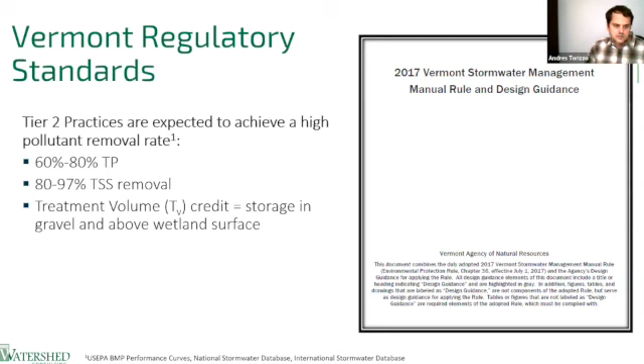So the manual currently has some key specifications, basically that the inlet pipe shall be set either at the permanent pool, but that's not really relevant for a gravel wetland. There is no permanent pool, so it's really at the base of the gravel bed. That's really specific to the gravel wetland.

There's also other constructed wetland options in the manual. Stormwater shall be conveyed from the surface down to the subsurface perforated distribution lines. So the water comes down from the surface and gets distributed within perforated under drains through the gravel layer. Then subsurface water level shall be maintained in the gravel wetland through the design of the outlet elevation. So that's what I was saying, the outlet being perched so that the water within remains saturated within the stone at all times.

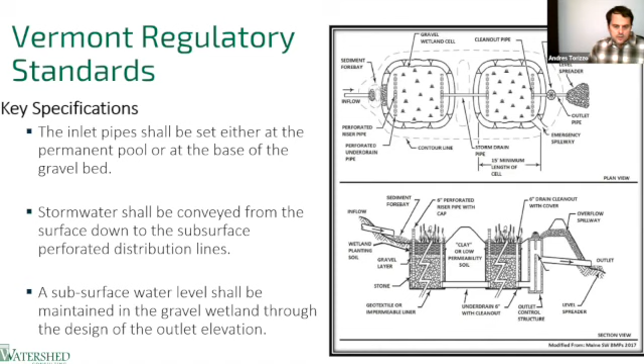As I had mentioned before, this water quality volume, which is the volume generated during the 1-inch 24-hour storm, is stored in a combination of gravel storage and also extended detention. The extended detention shall not exceed 50% of the water quality volume. So that's just one of the limitations in the manual.

The manual calls for treatment cells having a length to width ratio of 1:1 or greater, and then the minimum flow path being 15 feet within the wetland. So this is all focused on really making sure that the length that the water flows through the gravel is sufficiently long to get desired treatment.

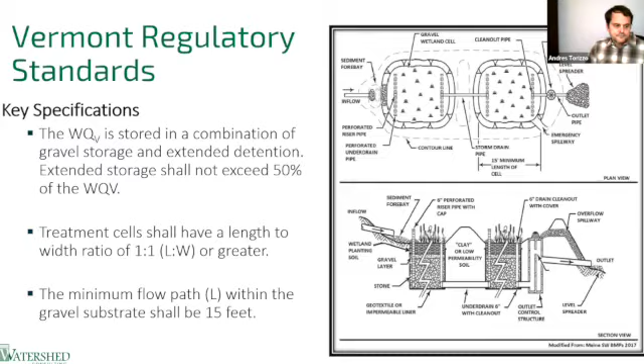So there's some key aspects in the manual which are absent. For example, the manual is silent on whether you need to have 1 or 2 cells, possibly more cells than that. The wetland soil muck, the phosphorus content, the organic content, and also the saturated hydraulic conductivity. So the wetland muck is a real focus of our research. We're going to get into that.

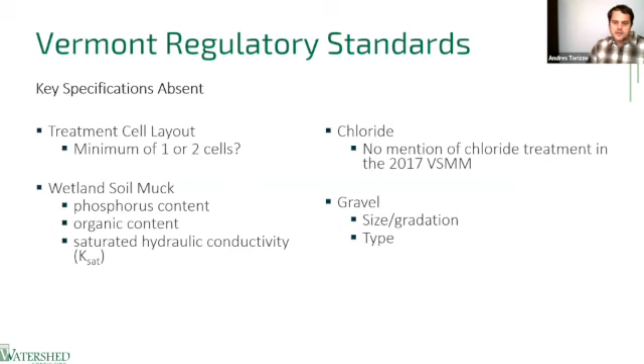There's no mention of chloride. That's kind of an aside that we're not going to get into too much. That was looked at as part of this study, but we're not going to cover that today. And then any specifications on the actual gravel, the size, gradation, the type of stone, whether it be limestone, granite, etc.

Because of the gaps in the current manual, designers have looked towards other manuals. This is one, the UNH manual. I referenced when we first did our first gravel wetland, I think in 2007, we used the first generation of this manual. These were developed by the UNH Stormwater Center, and they've put out a couple versions of this manual here.

So this manual specifically calls out having the muck be a low hydraulic conductivity soil, having a minimum of greater than 15% organic matter in the muck, and then clay not to exceed 15%, which may result in drying and cracking.

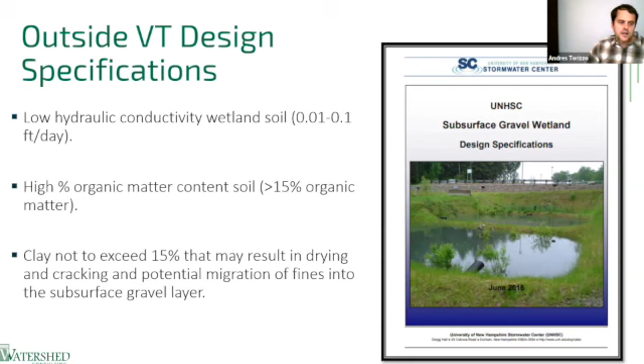So in terms of the phosphorus index of the muck, this is actually from North Carolina State. This was the reason that we're highlighting this phosphorus index for the soil must be low, between 10 and 30 milligrams per kilogram. This is a spec for bioretention soil, but it has been adopted on some recent designs, including the 2 projects that we're going to present on today, where we've done our monitoring as a standard that has been used for the muck specifications, because there was really no other specific phosphorus standard. So this is one that has been adopted before.

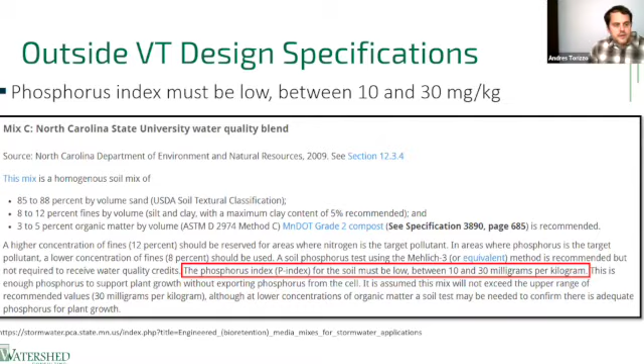So this study is important because gravel wetlands within the permitted environment have really proliferated substantially. There's more than 100 now permitted under the 2017 Stormwater Manual, which is the new manual. There's a lot more in process right now with all the focus on stormwater retrofitting. So there's a need for permitting review and approval consistency, and a lot of confusion because of the absence of some of these specifications from designers and reviewers about what is appropriate, what is not.

And in terms of the muck, there is really the variation in local vendor materials not well described. So when you're getting your muck from one location or another, you may be getting a very different product. So I think that there's a need to have better understanding of the actual composition of the products that are being received.

So the research questions that we really focused on are: do gravel wetlands that are being permitted under the 2017 manual perform as expected for both flow attenuation and for phosphorus capture? Because the two that we studied are put in place for both purposes, controlling flow, but also capturing phosphorus. There was a lab component to this. Eric Roy is on, and he really headed up the lab piece. We're going to touch on that a little bit, but mainly we're going to be focusing on the field components. So at this point, I'm going to pass it off to Nisha, and she can take us through the experimental design and some of our results.

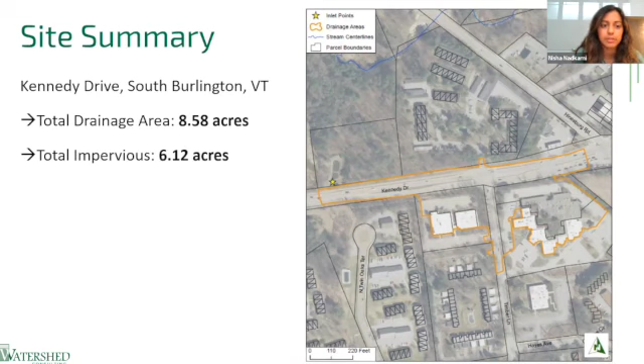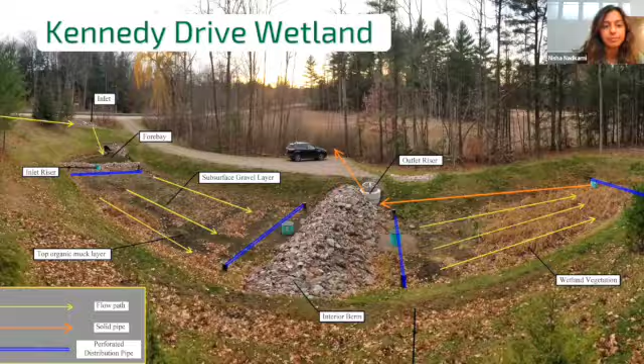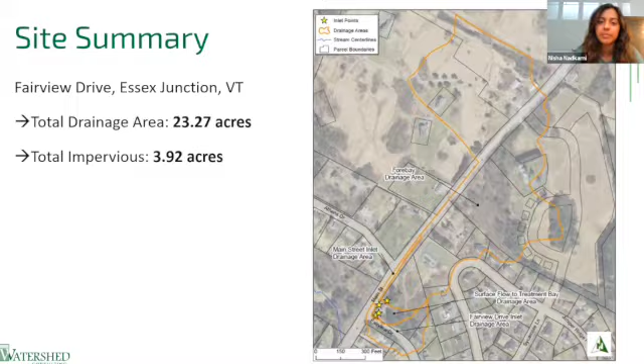The second site we looked at for monitoring is located in Essex Junction, and this drainage area is primarily residential. Compared to Kennedy Drive, this drainage area is a bit bigger - we're looking at 23 acres, with a smaller portion being impervious, close to 4 acres. The configuration of this wetland is a little bit different: we have 1 treatment cell and 4 inlet points.

The first 2 on the right side of the screen come into the inlet, where it enters the inlet riser, and the inlet riser brings this flow to a hydraulic inlet. The hydraulic inlet also receives 2 additional inlet points on the right side of the screen at the top - that road is Route 15, and the left side arrow is coming from the residential street. So all of that inflow passes through the hydraulic inlet and travels across the treatment cell in the perforated distribution pipes, and then it enters the solid pipe through the outlet riser.

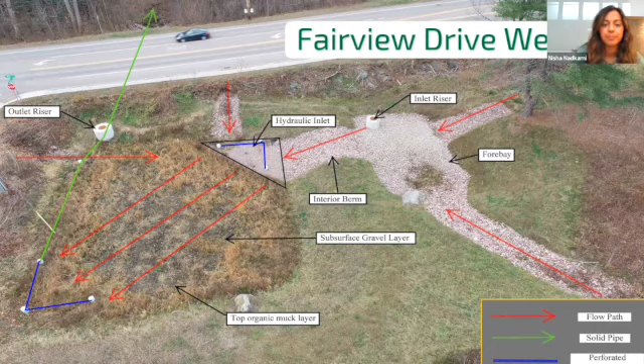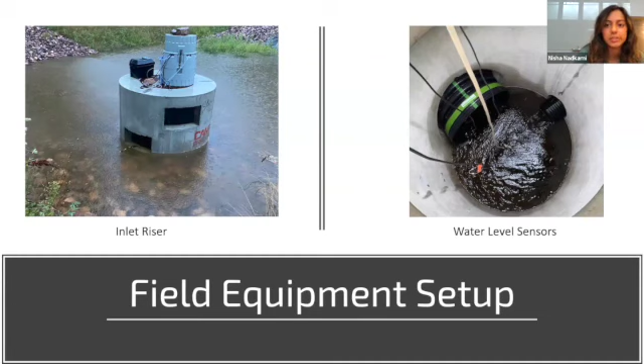For our field setup, we're going to just talk about the flow configuration today. We used automated samplers, ISCOs in particular, to monitor flow as well as to take samples throughout a storm event. Depending on the storm size, the frequency and the amount of sample taken was variable depending on the storm characteristics. This is just a photo of what it looks like in action during a storm. Looking inside the riser, we have several sensors monitoring water level in order to cross-check that these data sets are accurate.

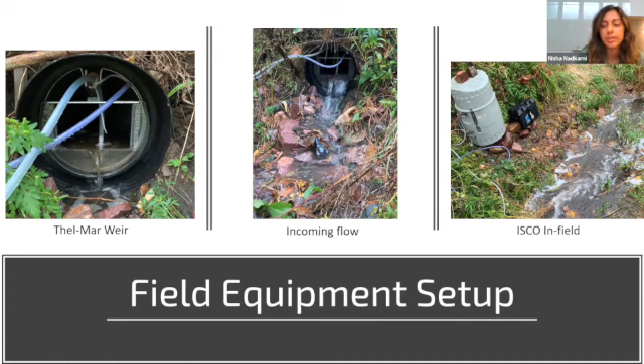More action photos for our culverts. We had Thel-Mar weirs measuring flow, and that Thel-Mar weir is connected to the ISCO on the right, which is feeding it real-time flow measurements and taking samples at the same time.

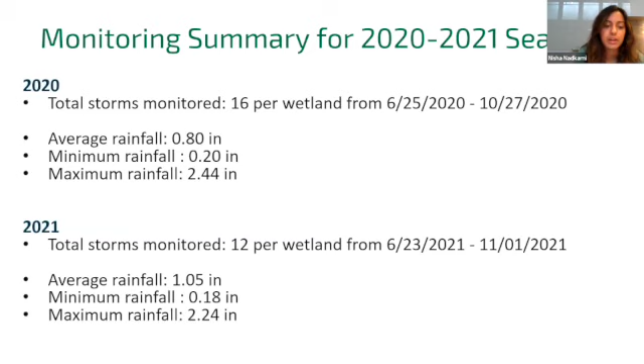This slide is showing our monitoring summary for the field seasons 2020 and 2021. Our target range for monitoring was June to October, and a little bit into November for the second field season. For each season, our goal was to monitor at least 10 storms in order to get complete data sets. We ended up monitoring a little bit more than that - 16 in 2020 and 12 in 2021. Our average rainfall 2 years ago was 0.80 inches, and our average rainfall was a little bit higher last year, with a little over 1 inch of rain.

Out of those 16 and 12 storms from each respective year, I've pulled a couple of hydrographs to show the performance of some of these storms. This is an example of a storm we monitored last July at the Kennedy Drive wetland. We have the inflow modeled in blue, and the outlet graph shown in brown. The total inflow was 22,000 cubic feet, and the total outflow was 18,000, or closer to 19,000 cubic feet.

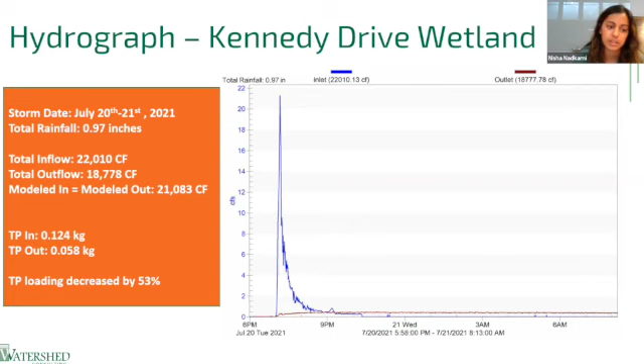You can see from the shape of the graph that we have a very prominent peak flow coming in, and then we see that the flow attenuation is acting the way we want it to - we see a nice sustained outflow, very low on the graph, showing the outflow. In terms of how this compares to the modeled flows we calculated in HydroCAD, the software we use to determine what these inflows and outflows will be, it actually modeled pretty similarly, at 21,000 cubic feet. We also saw in this particular storm that total phosphorus actually decreased by 53%.

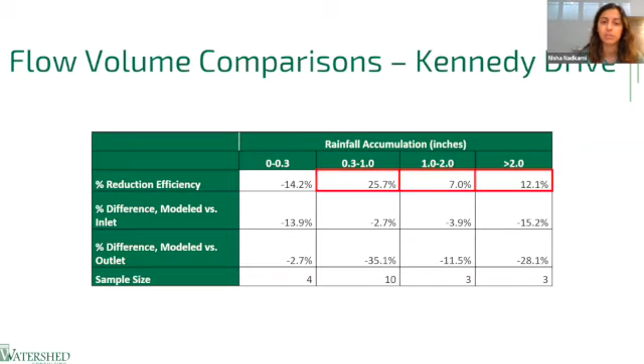This is one hydrograph shown from the Fairview Drive wetland. This was a storm back in 2020, a larger 2-inch storm, and we had 57,000 cubic feet come in from our 3 monitored inlet points.

In this particular storm, we saw a lot of retention in the system, with only about 33,000 to 34,000 cubic feet come out. Compared to the modeled flows, we actually saw a lot less come in than the model predicted, which was closer to 63,000 cubic feet. And in this storm, we did see TP loading decrease by 50%.

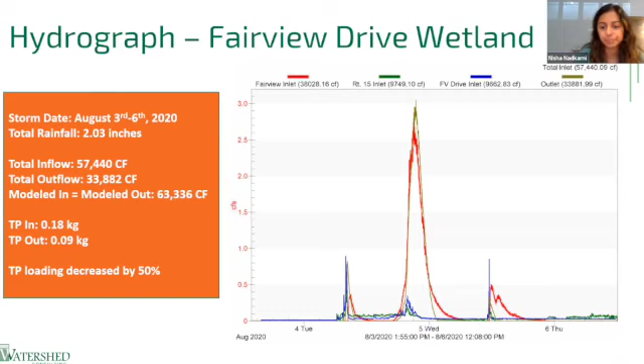This is the flow volume comparisons for all of the Fairview Drive storms. I want to point out that our sample sizes are pretty small. We had a limited number of complete data sets due to various equipment malfunctions, so we worked with the complete data sets we had, separating them into 4 storm categories. In all 4, we saw percent reduction efficiencies that were pretty high in each storm category, at least 40% and above.

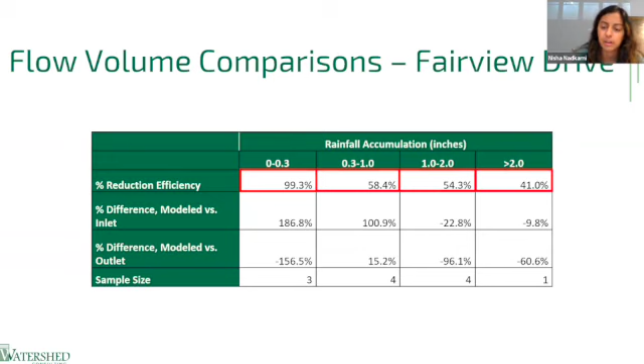Now getting into the pollutant loading and reduction efficiencies that we measured, we have a box plot here focused on the Kennedy Drive wetlands, showing chloride, TSS, total dissolved phosphorus, and total phosphorus. For the sake of time, we'll just look at the TDP and TP sections. We saw for year 1, in peach, and year 2, in blue, that TDP exports were far greater than the imports, as well as TP exports exceeding TP imports.

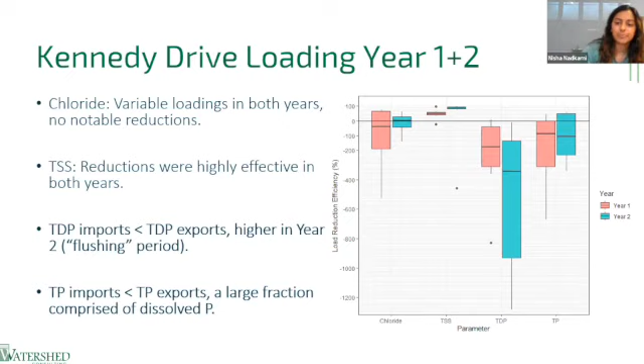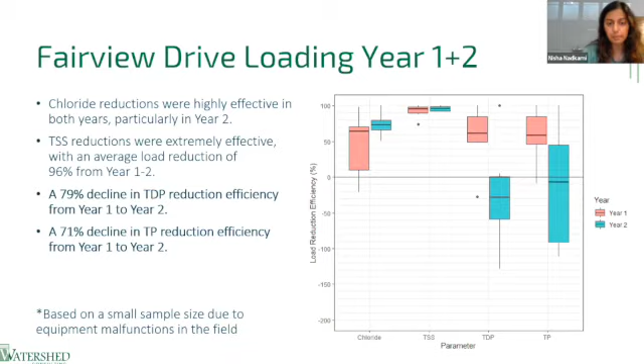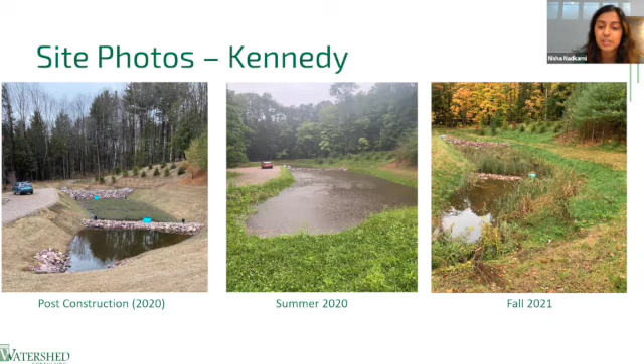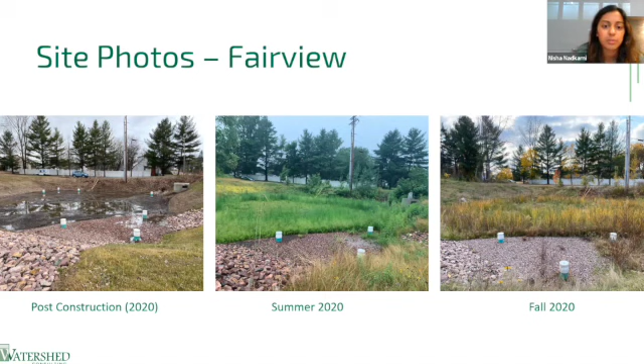We're going to talk a bit more about the lab portion and why we were seeing those results. These are some site photos showing what the wetlands looked like post-construction through fall 2021. At Kennedy Drive, we didn't have time to talk about the vegetation today, but it did struggle to establish in this area, eventually showing some growth later on, though it took a while compared to Fairview, which was in a more residential area where we saw the vegetation establish pretty well. So I'm going to bring it over to Eric to talk about the lab portion and focus more on the wetland soil muck component.

Thanks, Nisha. As Andres and Nisha mentioned, our study included both the field component and the lab component. That's really nice because with the field study, we get this net P reduction or not at the field scale, but it doesn't necessarily tell us why we see what we see. So we used some lab work to help open the black box, so to speak, and look at the different materials being used within these systems. One material we focused on was the muck material that Andres talked about earlier. We conducted a series of 2 experiments using column setups, designed to help mimic what is happening, or at least what is supposed to be happening, out in the field.

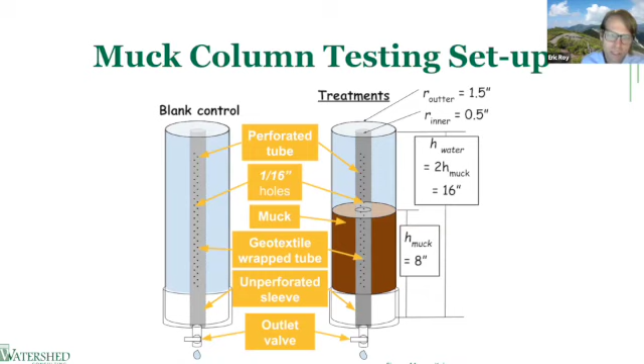So in these experiments, we used a synthetic stormwater. This synthetic stormwater included 0.2 milligrams phosphorus per liter as orthophosphate, as well as some nitrate, ammonium, and chloride at concentrations that have been observed in the field in Vermont.

We used this synthetic stormwater in a series of triplicate columns for each treatment, also including controls. What I mean by control here is these were blank columns that did not include any muck material, but were subjected to the same experimental conditions. This helps us make sure that it's not our experiment causing the change, but actually the material.

For each column, we simulated 6 storms. These are simulated events where we added synthetic stormwater to achieve an 8-inch ponding depth, which is the depth we'd expect to see in the field. We held that for an hour to allow chemical equilibrium, then initiated a slow draining process while maintaining that 8-inch ponding depth. Each storm volume was about 3 liters.

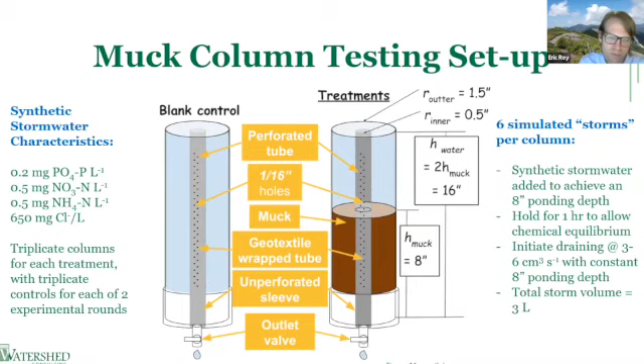We decided to follow up this experiment with a second one, where we tested the EM1 material after it had been in the field for approximately 1 year. We also wanted to understand how these results compared to native soils at the sites. In that second experiment, the take-home result was that even after a year in the field, engineered muck 1 still had greater SRP export in the column experiments than the 2 native soils from each site.

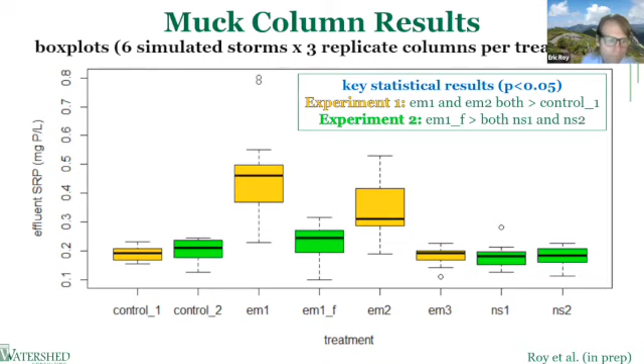Thanks, Eric. I'll just go over our conclusions for the field component before handing it back to Andres.

As I had mentioned, showing the flow volume comparisons, we did see a lot of retention of flow volume in all of the storm categories up until the 2-inch storm, even though both systems were not originally designed to reduce these flow volumes. But we do see that the fields, particularly the Fairview Drive system, were very effective at retaining these volumes, and both systems were really effective at attenuating flows from the 0 to 1-inch storms.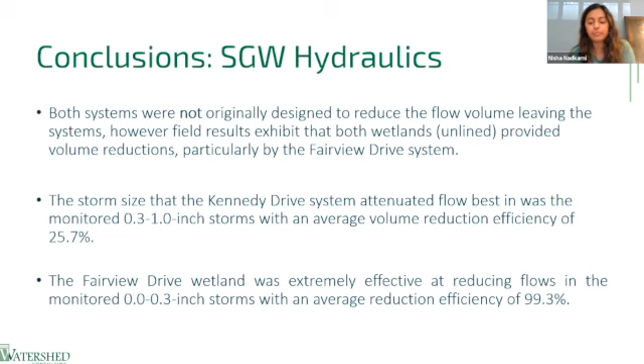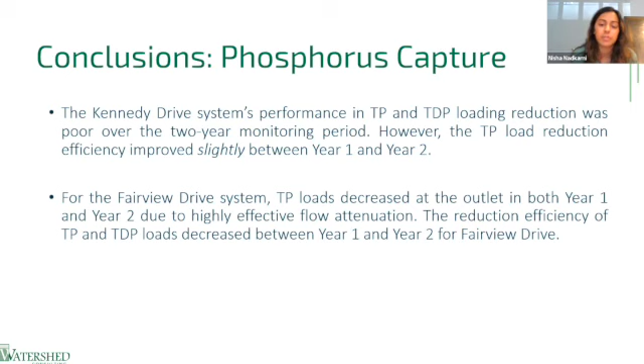Going back to the phosphorus conversation and why we were noticing exports that were exceeding the imports, we are seeing that in the first 2 years the exports have been increasing compared to year 1.

Looking at the timeline for how long this will happen, we expect that with extended monitoring of TP and TDP within this system, it would be interesting to determine how long this flushing period would last until the wetlands start retaining enough phosphorus to observe the desired P load reductions, which Andres had mentioned should be between 60 and 80% TP removal referenced in the stormwater manual.

And I'm going to hand it over to Andres to talk a little bit about solutions for this performance.

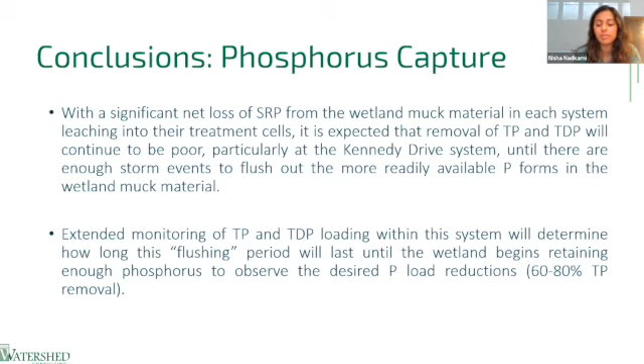Thanks, Nisha. So I think one of the most interesting findings that came out of the research that we've done was really the use of native soils to limit the introduction of nutrients, to save cost and to reduce unnecessary carbon emissions by trucking materials.

So it seems like a novel idea, but progressively designers have been really focused on engineered mixes, importing engineered mixes. But in a lot of cases where the conditions are right, native soils can definitely be appropriate, and they're calibrated well to the site in terms of phosphorus content, so they're not going to have that high level of phosphorus in a lot of cases. So they're really a good resource to use.

Secondly, incorporating a higher clay content and an absolute minimum organic content to support plant growth really makes sense. That higher clay content, the UNH manual specifies a limit because of potential issues with contaminating the gravel layer and cracking of the clay material.

But we still think that could really be offset by the fact that clay has low nutrients and really low hydraulic conductivity, which is really important to prevent short circuiting.

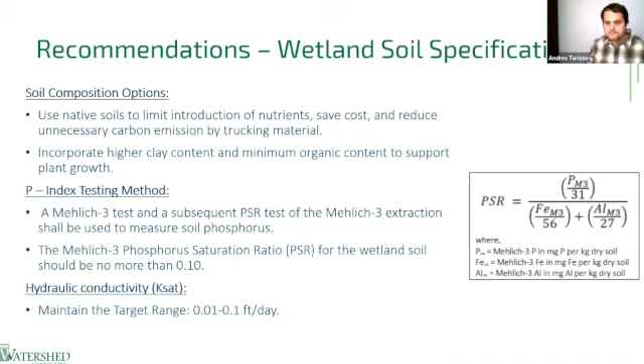And then the hydraulic conductivity, maintaining that very low conductivity, 0.01 to 0.1 feet per day. And just on the right there is the calculation of how to calculate the PSR with iron, aluminum, and phosphorus.

As I mentioned before, there's a lot of gravel wetlands currently in place in the ground in Vermont. So one strategy may be to actually test the mucks to evaluate whether or not P leaching may be occurring, depending on that PSR ratio.

There may be, we're not going to get into it today, but there are other experiments ongoing studying amendments to enhance the P removal capabilities of certain types of BMPs, using things like water treatment residuals or the St. George black shale material, which we tested in the ag environment and it works really well. There are definitely some good opportunities to incorporate some of those things in systems where maybe the muck is resulting in phosphorus leaching currently.

The other thing that's going on is working on a new guidance document, which is outside of the regulatory manual. The state stormwater section doesn't have the capability right now to update the manual, but there's been discussion about basically generating a new FAQ type document that would be available to designers with this information in there to provide that guidance so people can take advantage of it now. That's hopefully going to be at some time in the near future, and that's being headed up by the GI Roundtable.

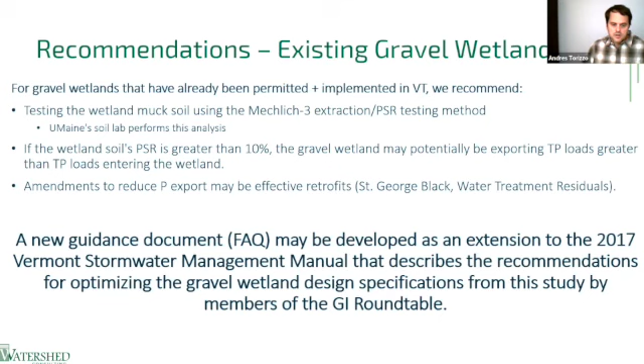So just quickly, I'm going to run through these two case studies. These are two projects - the first project here is at U32 High School in Montpelier. This is a project that was just constructed about a month ago. This is a site where it's required to comply with 3-9050 operational stormwater permits. It's a regulated 3-acre site, so subject to retrofit. The design here is a one cell design.

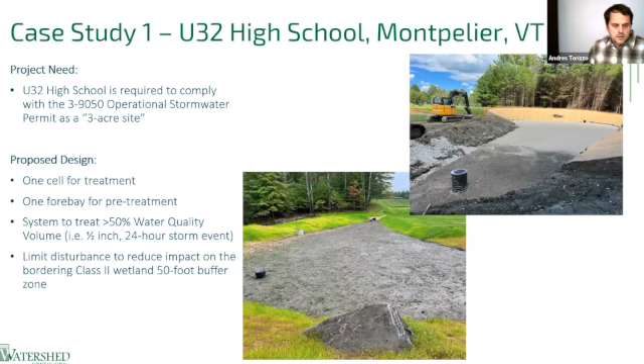There's a forebay for pretreatment. The system's designed to treat greater than 50% of the water quality volume, so that's half an inch of rain in 24 hours. One of the constraints is that this site does border a state regulated class 2 wetland, so there was some wetland permitting involved to actually get it constructed.

If you back up one, just to give the setting here. On the left is the NRCS soils map, showing that all the red are D soils. So we were expecting them to be heavy, and that's why we chose the gravel wetland, and indeed they were. On the right is the drainage map. The gravel wetland that was designed manages impervious acreage of 5.72 acres, with a total drainage area just over 14 acres.

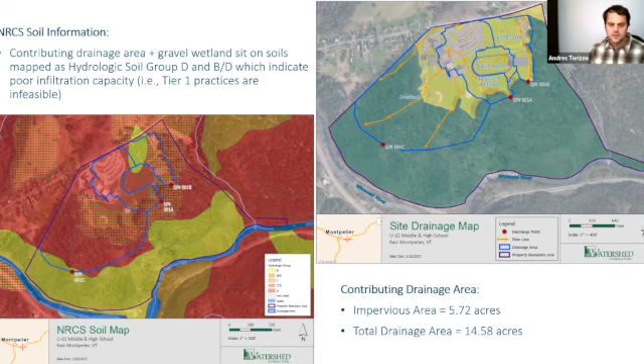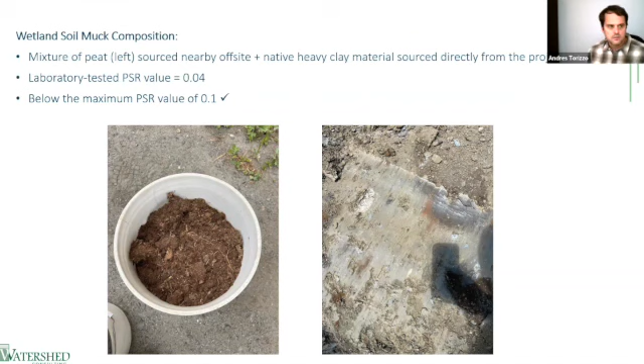Just a close-up of the native soils on the right. You can see it's a real clay-based material, there were stones, so the soils needed to be screened on site. We mixed in a pretty low percentage of peat, which is on the left, a very dry, fluffy type material. We integrated a little bit of that into the final mix, just to give a little more organic content to get the grass grown, but at an absolute minimum. This material was tested, the PSR value was 0.04, which is below the value of 0.1, so that checks the box.

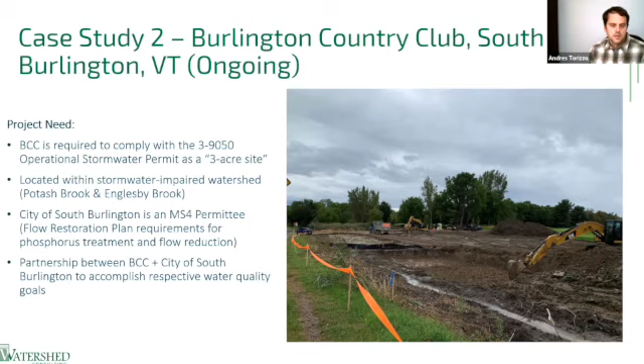The second site is at the Burlington Country Club, right off of Spear Street. This is a project that's ongoing right now. The Country Club is required to comply with 9050 operational stormwater permit requirements. The unique thing is that it was also scoped originally as part of the Potash Brook Flow Restoration Plan, so it's helping the city of South Burlington meet their flow-based TMDL targets. It's a wetland designed not only for water quality treatment, but also for channel protection volume control, which is the 1-year storm, a little over 2 inches of rain.

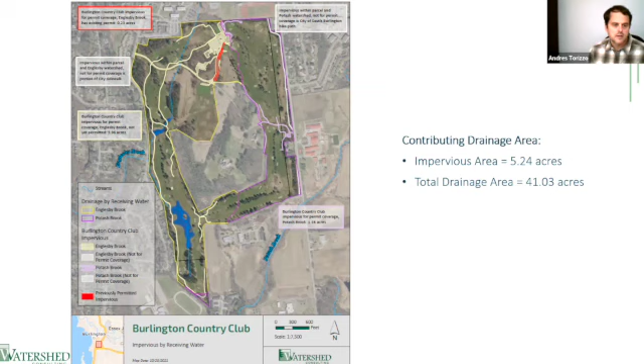This is just the drainage map. In purple on the right is the drainage area for the wetlands. It treats some impervious area from the golf course, but also a large chunk of Spear Street from about UVM south to past the Miller Farm. You can see on the right, just north of Potash Brook, 5.24 acres of impervious area.

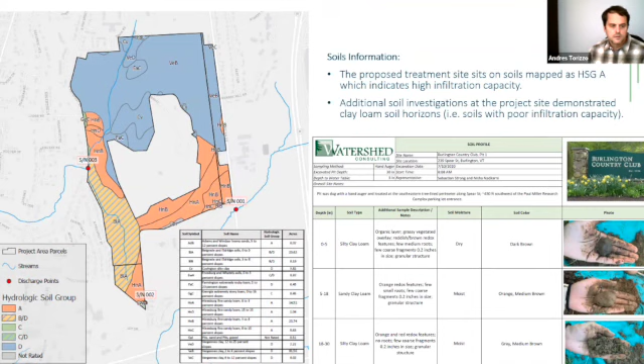Just a note on the soils: the pink area is actually hydrologic soil group A. On the left, if you see the SN001 point, the gravel wetland is located fairly close to that corner, so it was actually located on soils mapped as A. However, based on on-site soils testing, the soils were heavy clay, which is the reason we selected the gravel wetlands.

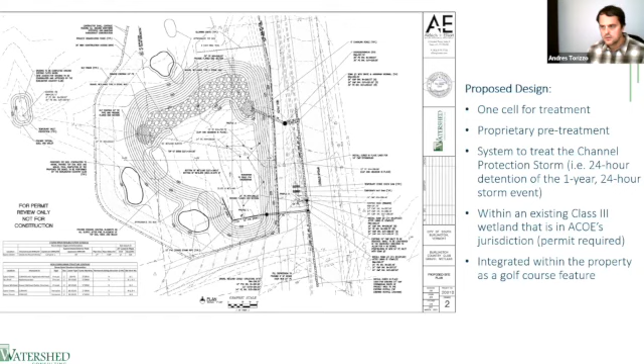We don't have quantified numbers to provide, but both of these are really good examples of ways to utilize native material and prevent a lot of trucking of material over the roads and a lot of excess cost. It simplifies the project and also achieves the goal of keeping a low phosphorus soil, which will sustain some plants but not be overly likely to leach phosphorus.